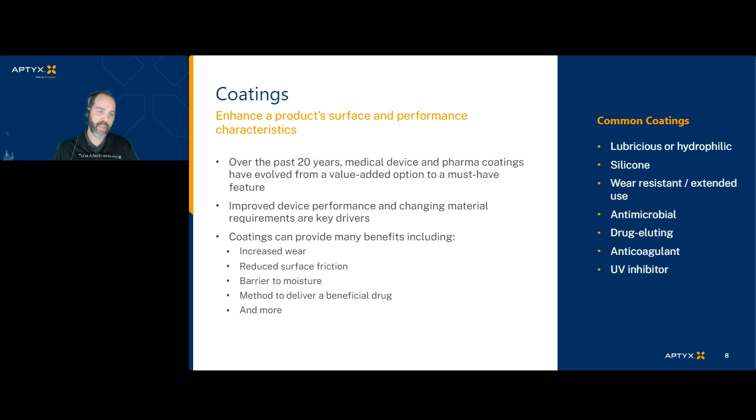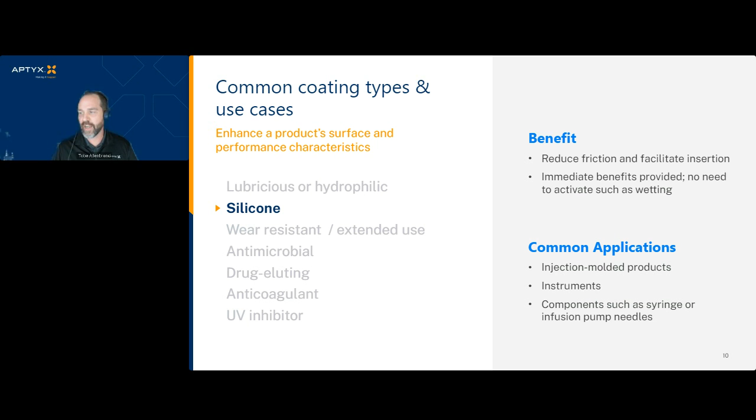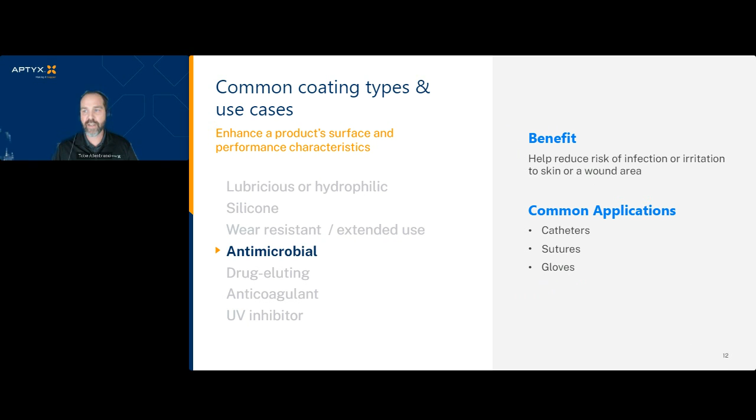For applications such as lubricity or hydrophilic, just recently we had an application that required first-time smooth actuation. And you can't always depend on a pre-compounded plastic or rubber material, as they typically require actuation, allowing the lubrication to bloom to the surface. For this reason, we may use a topical silicone coating for projects such as a pre-filled syringe, an auto-injector, or an infusion needle. We could also help with wear resistance, antimicrobial coatings, drug-eluting, anticoagulant, and UV inhibitor.

We got a question here, and thanks for those who are submitting questions. Do you folks recommend coatings, and how do you play into the selection of coatings? We absolutely do recommend coatings. As Toby indicated, we're not a coating supplier, but we've worked over 30 plus years with a multitude of coating suppliers, and some of those are our customers themselves who develop their own proprietary coatings.

But when the application is brought to us and a customer does not have a specific coating defined, we're looking at the attributes that they're looking to achieve, and then we're going to suggest possibly considering either a coating or a polymer that might be suited to reach those goals. And then we'll offer to evaluate those in conjunction with them, apply those coatings, and evaluate the pros and cons of those coatings based on process, cost, and the product features they're looking to achieve. Great.

Oh, I think you're muted again.

Start off here with the applications and the types of coating and how they're applied. Basically, spraying or dipping are the two primary methods of applying a coating. And the automation that's implemented there is either what we refer to as continuous motion or robotic batch.

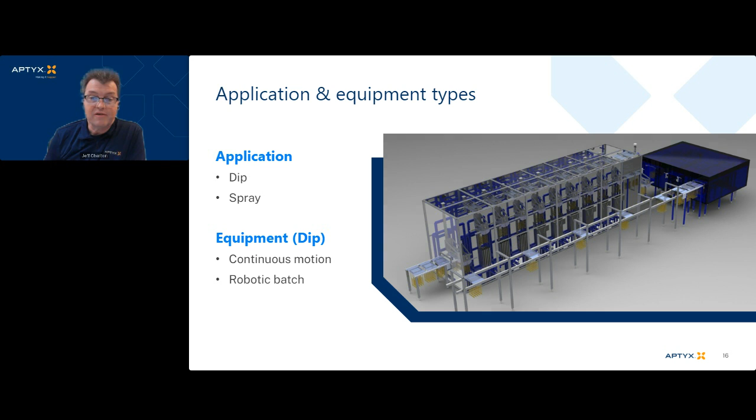Continuous motion equipment, as it may sound, is basically a process that is continuous. There's no pausing or stopping, so parameters need to be fairly well defined, such as the timing for each of the steps. So it lends itself to a mature process.

It also lends itself to a single type of product that doesn't require variability based on geometry or based on chemistry changes. Examples of this might be something that's presented to the equipment in a reel, or on some type of feed that otherwise can then be let into the machine in a continuous manner and also continuous velocity.

This would be something similar to a suture. So if you can imagine a suture material taken through a coating system, it starts on a reel, it would go through the various coating steps, and it would be deposited back onto a reel again.

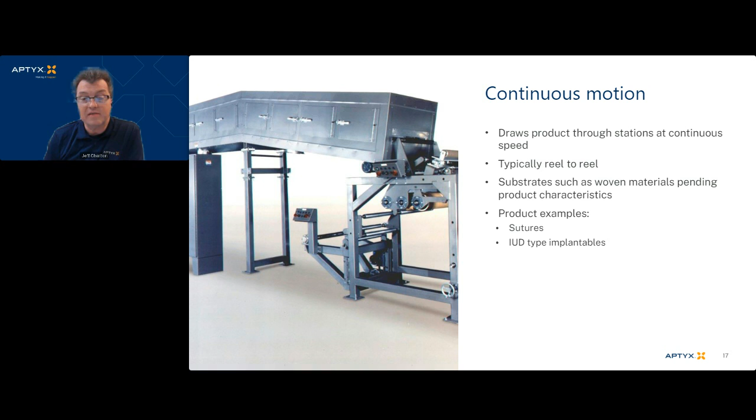A robotic or batch system, which quite honestly is probably the most prevalent with coating methods, is a method that allows each of the process steps to be performed at a station until it's moved to the next station. Very simply, the process may start at loading the product onto the carriers. That could be done by robots or it could be done manually.

Then the product is introduced to the cell, which is going to apply the coating, starting off possibly with the initial coating cycle or even a cleaning cycle if necessary, followed by drying the product, and then followed by subsequent coating cycles if necessary. The drying methods can be varied in these particular applications, as well as the dipping process. If spray needs to be introduced, which can be done in conjunction with dipping, it can be introduced to one of the cells within this batch method.

The batch method, in essence, allows the product to walk through the various stations until eventually it is completed. Then it exits to an unload queue, where the operator or some type of automation is taking it on to the next step within the process, or to packaging, or to transfer to the final facility if you're having a contract manufacturer help you, like Aptyx.

Products that are examples of this would be catheters, guide wires, balloons, needles or tubes, rigid products such as those, or drug delivery components, which could even include sutures, or it could include stents, which are coated with drug elution that could be released over time to the patient.

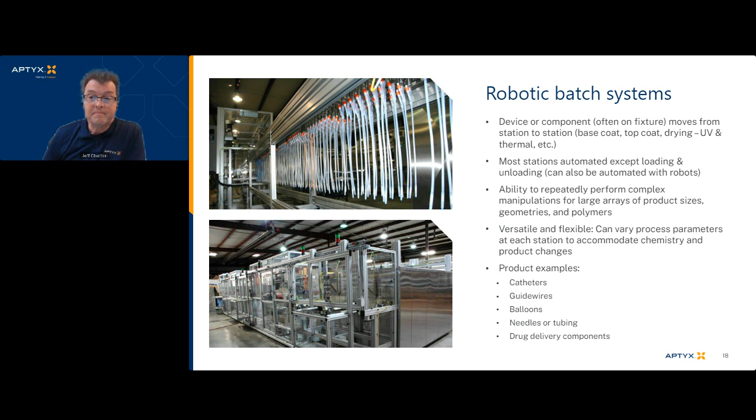Process and scalability factors certainly relate to the products themselves, the geometry of the products, the size of the product, any unique features of that product that might need to be considered. The coating, handling of the coating, duration of the coating's life, the environment the coating needs to be maintained in for purposes of consistency, and then the equipment itself with regards to maybe the space available within the facility, how we have to lay that out.

So there's a lot of scalability factors that come into play, and throughput, of course, is one of them. But mostly it all boils down to just discussing with our customers up front the scalability or the actual factors regarding what they're trying to achieve, and the features that they're looking to achieve with regards to the final application.

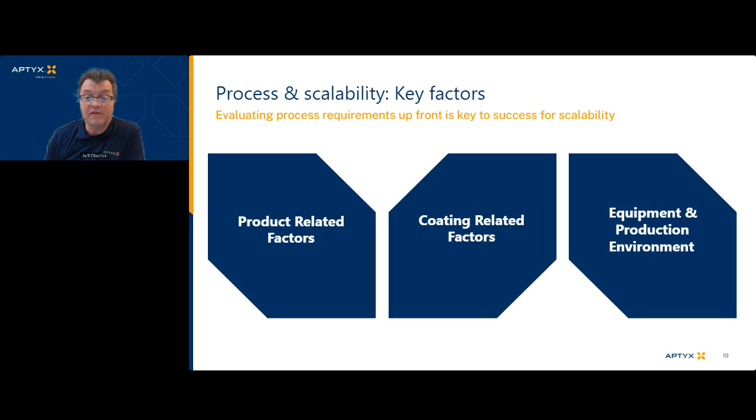Case in point, we did have a customer approach us at one point that had a very mature product line. Assembly was already underway, and they wished to address a feature that was a detriment to the actual use of that product, in which they wanted to decrease friction. So they asked us to review how we could apply a coating to help reduce friction in that particular product before it was assembled.

We took that product, evaluated the best way to address it in bulk because it was a very high volume, commodity style product, and we came up with a method of applying a non-cross-linked silicone that would reduce friction, allow that to be assembled into the product in an automated manner without a high level of transfer to the feeding devices used in the assembly process, primarily bowl feeders, and then were able to implement that in a scalable fashion so that it could be produced in several million parts per month for this particular customer.

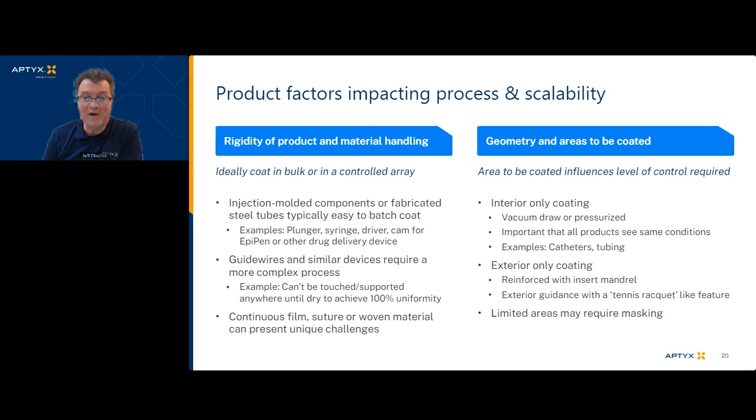Wow, I didn't realize guide wires were that long. Okay, great, thank you.

Go on to the next slide here. Coating solutions, solvent-based coatings, shelf life, aqueous-based coatings, of course, go along with that as to how they're handled, how we would approach a project and maybe make certain recommendations with regards to what would be suggested to start off to evaluate, to optimize how to move forward are certainly key factors.

We get into aspects of whether the project would benefit from monitoring certain aspects of the process, such as the environmental conditions, or the properties of the material itself that's being applied.

Level control comes into that. Certainly if you're coating an exterior portion of the product and you have a very tight tolerance, you wish to make sure that your coating solution level within the bath or within the container is maintained. So we have to maintain the makeup solution. We would monitor level. We would look at the properties of that material dynamically as well, with regards to potentially having to adjust it over time if it needs to be adjusted from a viscosity standpoint.

Drying, UV or thermal, are considerations. Both of those are somewhat predicated by the coating chemistry itself. Often that's the activation of how the coating is going to dry and maybe adhere to the substrate. The coating might dictate the type of drying process, and that would be something we'd have to integrate into the process.

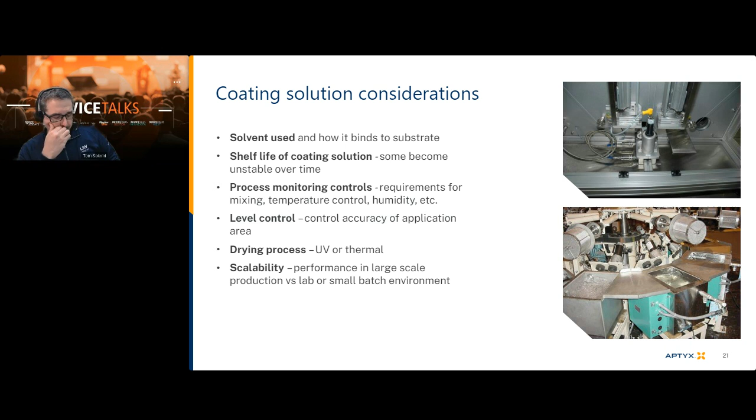Jeff, can you just review again the benefits of selecting a coating with thermal drying versus the UV curing that you were talking about? It's very chemistry dependent, and a lot of times customers come to us having already selected a coating, and of course that's going to dictate the drying process. From a material handling viewpoint, if somebody was selecting a coating that was either thermally cured or UV cured, the benefit I can comment on is that UV curing is a much shorter period of time.

Drying using thermal processes, usually lower temperatures for extended periods of time, can make the footprint of the machine slightly larger. It doesn't affect the throughput of the machine, because the throughput's based on the index rate. So if I'm indexing a set of parts every 2 minutes or every 5 minutes, that'll be the rate at which I get the parts out of the machine.

If I needed 100 minutes to dry something, I'm going to have multiple drying stations or steps, which is going to make the overall footprint of the machine longer. If I can UV cure that product in one step, basically in 2 to 5 minutes, then it's going to be a much smaller footprint of machine. And therefore your capital investment goes down as well.

The aspects related to potential downsides of having a longer machine could be a failure within that queue. And of course, all that product which is in that queue could potentially be deemed to be bad. So having a shorter process and a shorter material handling is certainly beneficial from that regard as well.

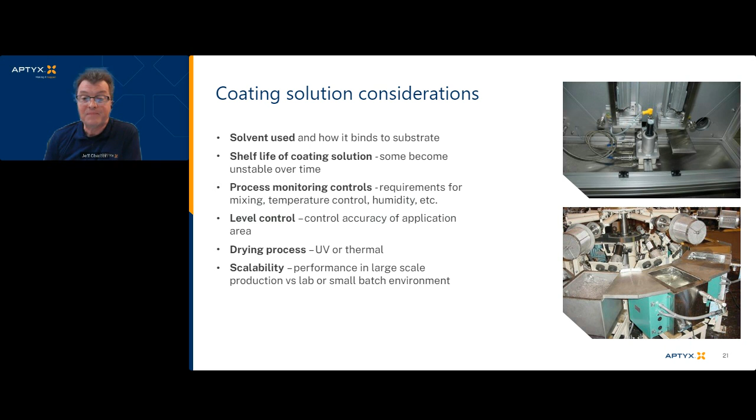Equipment and production environment, which I briefly spoke of: we'll start discussing with the customer whether the project is actually scalable to move directly to production. If it's already very mature, maybe something has already been in some type of production environment, but they're simply scaling up to a higher volume. We have several customers over the last 20, 30 years that we've worked with that have launched products, and they've been successful, and they come back to us several years later looking to scale up so that they possibly can have more throughput or introduce a new product line to that existing coating process.

So we are certainly always approaching projects from different angles, but when customers come to us and they've simply matured something or started to look at something, we may suggest starting off at a lab or with a pilot scale type operation where they can develop samples sufficiently to maybe introduce to a certain test market, and then decide whether or not that is viable to move into a higher volume type of scenario.

Equipment often has to be evaluated based on the material handling. We talked about continuous motion and batch earlier, but we also look at the importance of how the coating is being applied. The entry speeds and the withdrawal speeds are very important in some coating applications because the meniscus of the coating is often what is applying the coating as the product's being removed. It's not necessarily associated with dwell time. Sometimes the dwell time is actually detrimental because it can remove or detrimentally impact the substrate that's being coated.

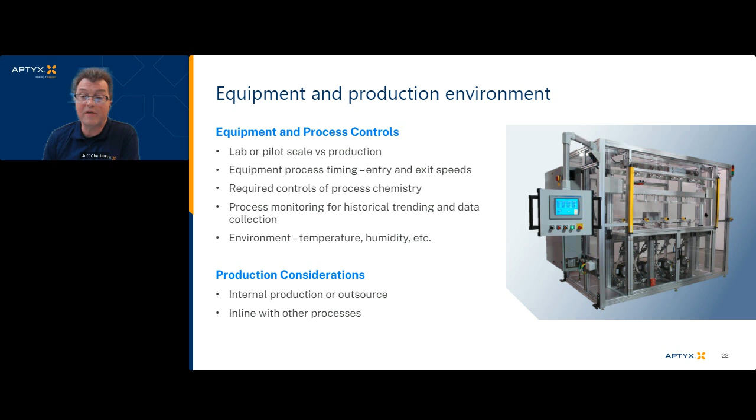Kind of blew through here. This is our last slide, and you're doing great. Great timing.

Wanted to, I guess, say detail is detail. One of the reasons my wife doesn't allow me to go grocery shopping with her is because I'm probably walking around with my phone all the time, calculating the price per gram, per ounce, and what's the best price on everything. That's just the level of details you have to get into. It's similar to what I do every day.

We look at the details with customers. Try to adjust their expectations with what's realistic from a production viewpoint. Oftentimes they're more on the R&D or possibly on the development side. Then we start talking about what realistic expectations are for throughputs, for capacity, for handling, and how possibly we can help them with all of the above.

The evaluation of the coating, determining what is optimal for their application, what is commercially available, what maybe is not commercially available but could be developed, and then also what features might be best for them with regards to either the cost of the coating, commercially available coatings, or the application of that coating and how it might impact their project.

We'll help define how to scale it and provide them estimates up front with regards to building a business case, so we can evaluate square footage of potential plant area necessary to support the coating application. We can look at labor content that might be needed for a semi-automated versus an automated process. We can also look at utility cost and then also budgetary cost for what the coating material itself will be.